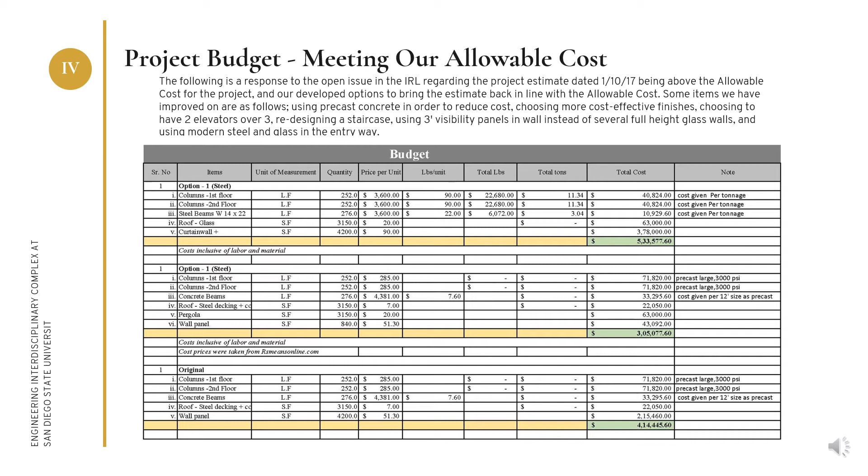To keep the schedule on track, efficient relationships between activities could be formed, and negative lag could be administered in activities wherever possible. Since the project is behind schedule and over budget, spending more time in the pre-construction phase and in value engineering to align activities will help.

A lot of construction activities can be done in parallel, and a lot of construction time related to that can be saved. Because of the collaborative work, most permitting and approval times are considered to be pre-planned and are eliminated at each stage.

Efficient planning can help in planning all procurement activities to be started on time to eliminate all lags. Because of all this, the new finish date is now July 18th, 2018, which is earlier than the suggested deadline.

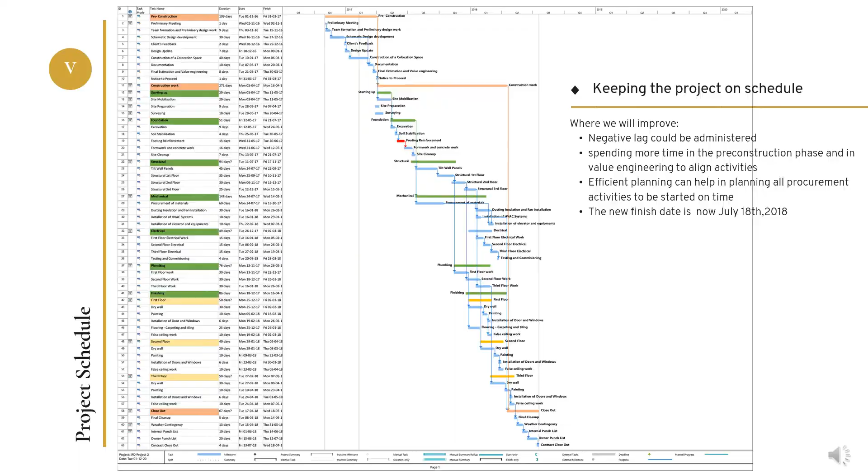Our construction management plan will explore different design options as well as other open issues covered in the IRL. Co-location in construction management and architecture refers to a common office hub where key team members work together to achieve aligned and optimized project goals using BIM, lean principles, and IPD processes by leveraging teamwork and synergy.

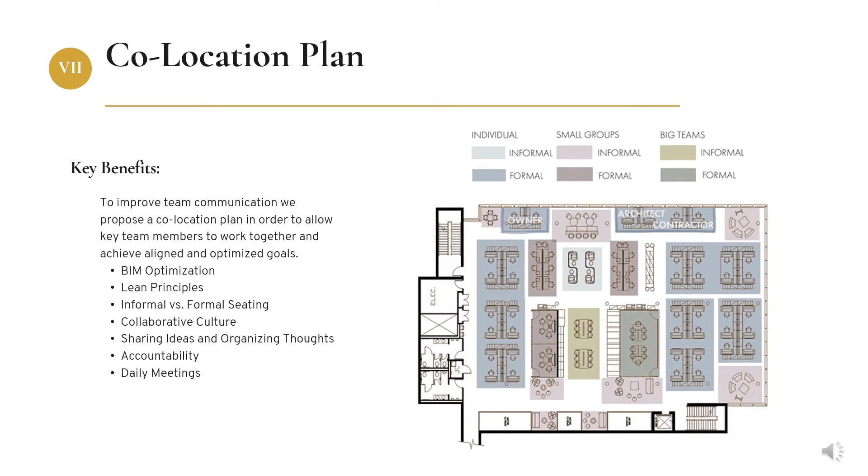We created a flexible seating arrangement that could be determined communally, depending on who needed close proximity to collaborate. We accommodate groups of varying size and played with the concept of formal and informal spaces to balance people who are more comfortable in traditional environments, while informal spaces are designed to take more fluctuations and be transformable. We foster a collaborative culture through using various walls as pin-up space or whiteboard space, and keep everyone on track with a wall-size schedule and informal morning meetings.

Our first design option study was to reduce the full height glass walls to a regular stud wall with a 3-foot visibility panel. Functionally, this achieves the same safety objective of being able to see into the space and be aware of the ongoings of the lab. Aesthetically, it is a detraction because you're not able to see the complete space. However, it still offers just enough of a view to pique someone's interest and draw them to the space.

For this exercise, we calculated the linear feet of the full glass walls, which is about 840 feet throughout the entire building. While we believe the resolution lies with having full glass walls at key parts such as the first floor, cafe, and key walls in public spaces such as the meeting rooms, we have shown a comparison of the full glass versus the visibility panel wall for all of the walls.

Our second design option was to look at the main entry, which we later evaluated again by looking at the modern glass entry. Originally, we picked this space to do a design option because unlike the north and south building, it doesn't hold highly technical programs such as labs. We felt that the current design was overbuilt for what it had to be functionally, and it was the greatest area for slashing the price of the overall building.

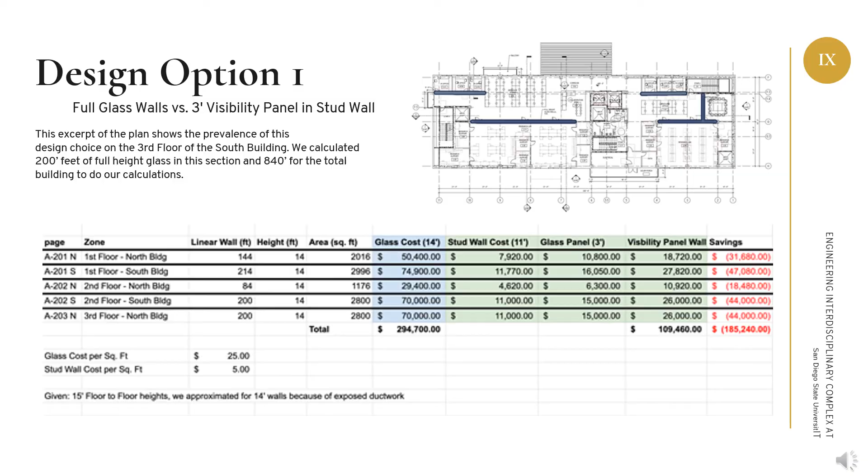To calculate the difference between the options, we used the vertical height between the floors to calculate the area of the wall space. We multiplied that by $25 for the cost per square foot for storefront glazing, then compared it to the other design option by multiplying $5 for the area of the stud wall plus the area of the vision panel, again by that $25 for the storefront glazing. The difference between the options was around $185,000.

We are going to later discuss the design strategy for areas to use this more expensive option and areas where the design will make a bigger impact.

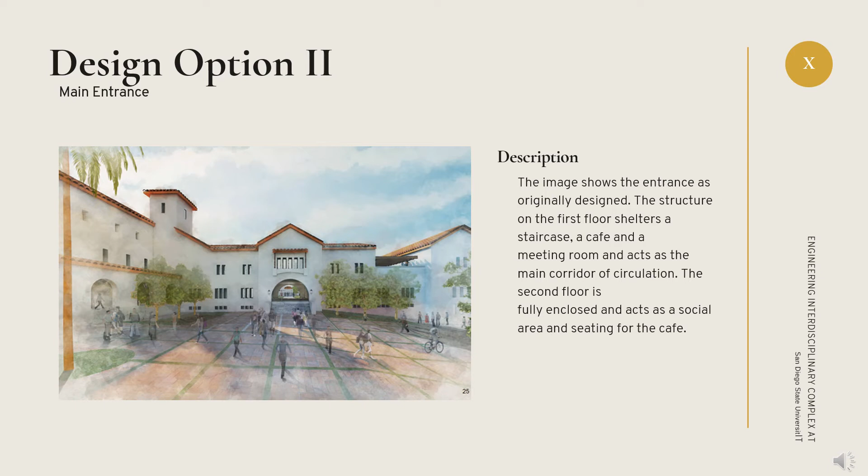We later revisited this when the owner requested we look at a modern steel and glass entry. This concept is an open colonnade repeated on both floors. The storefront and skylights allow plenty of natural light into the space and offer great views of the courtyard. This modern entry breaks away from the Mission Revival style, but keeps the building's internal rhythm and tries to emulate the color of the terracotta tiles with its red storefront framing.

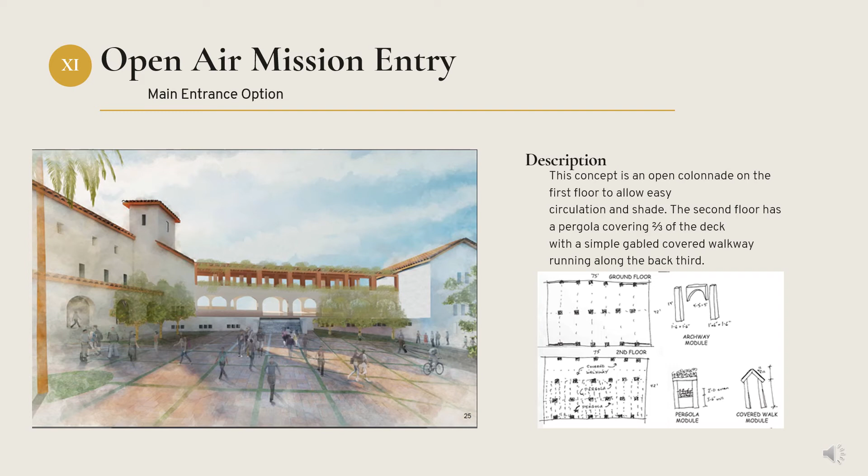Our team had worries about its greenhouse-like effect in the California climate and it gobbling up more of our mechanical and electrical engineering budget. We highly recommend not going with this option as it would be an eyesore, energy vampire, and have negative impacts on the budget.

Comparing the two design options in terms of cost, the cost of material is much cheaper for the colonnaded design option, that is option 1. This is because the first option will save money in terms of wall area footage and material cost since there is an open archway and colonnade on the first floor. The glass facade for option 2, on the other hand, will be costlier in terms of material cost as well as the wall area covered.

The glass roofing is also another high cost item that makes it the costliest option among the three. The structural cost of the steel and glass option, however, will be cheaper in terms of material due to the cheaper cost of the structural steel. When compared to the original design, the first option is the preferred design to save material cost.

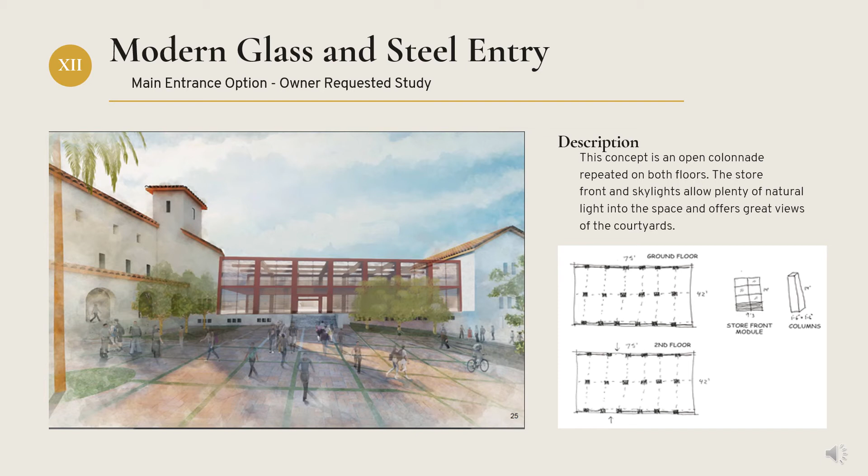Constructability varies for both of these options provided. The first option will require skilled labor if built on site and will be costlier and slower compared to the installation of glass wall. Contrarily, the structural construction time will be lower in case of the concrete option, saving time and money when compared to the steel structure.

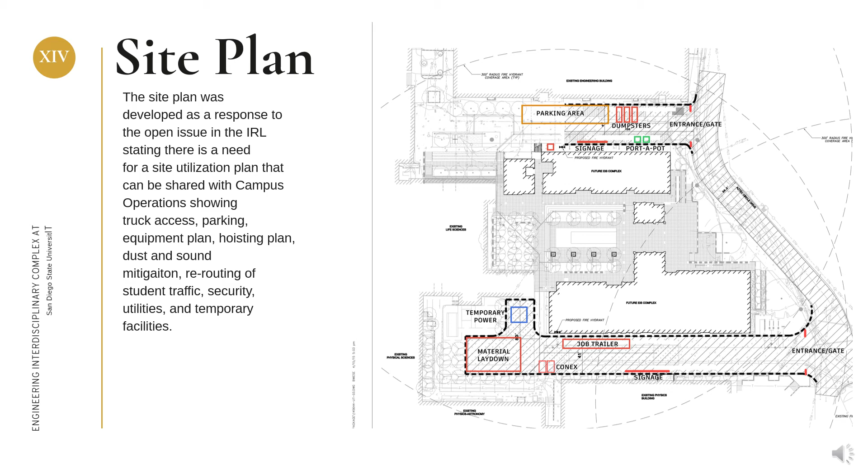The site plan was developed as a response to an open issue in the IRL stating there is a need for a site utilization plan that can be shared with Campus Operations showing truck access, parking, equipment plan, hoisting plan, dust and sound mitigation, rerouting of student traffic, security, utilities, and temporary facilities. The document to the right of the screen will show you the proposed site plan.

We have decided to suggest concrete in comparison to steel, considering some of the criteria such as strength, safety, cost, and environmental impact. Strength-wise, a reinforced concrete structure has relatively high compressive strength and gets tensile strength as well due to the reinforced bars. Safety-wise, since it's an educational building, occupant safety is always a priority, and concrete's natural fire-resistant property and its ability to sustain high temperature without losing its structural integrity makes it a great choice for a safe fire-resistant building.

In terms of cost, when compared to steel, concrete structures can be costlier in terms of the material cost, but since it can be sometimes built twice as fast, a lot of money can be saved in terms of a shorter schedule. For environmental impact, since the project aims to go for material and resource credit in LEED certification, which requires them to use a minimum of 50% of recycled demolished debris, and since the demolished building is also made of concrete, it makes a lot of sense to build the newer building in concrete as well.

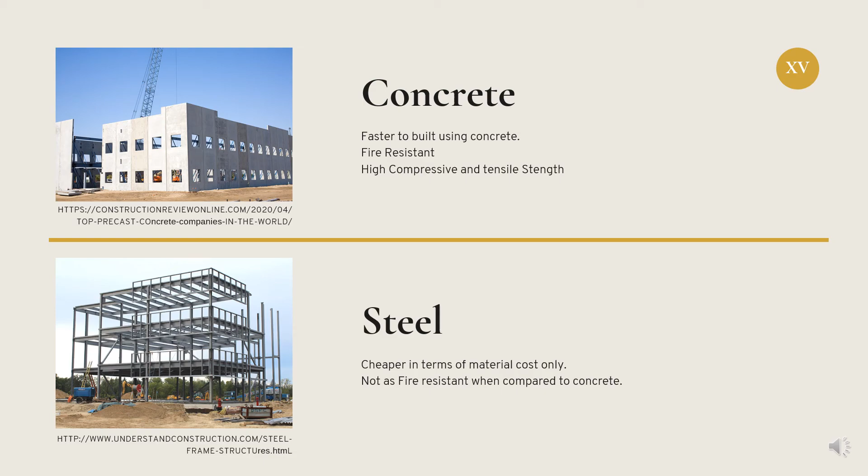The following response is a response to the open issue on the IRL regarding the fire marshal expressing concern about not having the capacity to review our project until January 2018. We have created a phased plan in order to allow for the fire marshal to review smaller components over a greater period of time in order to complete the project on schedule.

The fire marshal reviews cover an array of drawings, specifications, and schedules. We elected to break up the information into phases based on how granular the information is. Our strategy behind a deductive method was the fire marshal would be able to review more specific information concurrently with how the design was being refined, thus saving time and speeding up the schedule.

For example, we found very explicit and precise requirements for the lab in the building that would be pointless to cover during schematic design when layouts were fluctuating. While less items are covered in later phases, these issues will be resolved in greater detail. The phases are as follows.

Phase 1: Identify occupancy class and compliance with special occupancy requirements. Identify type of construction. Provide site plan with hydrants, property lines, and setback indicators. Provide floor heights and areas for each story of the building and demonstrate code compliance. Provide a hydrant calculation. Provide design numbers for fire-rated construction. Identify compliance with egress issues. Demonstrate accessibility compliance. Classify each space in the building with loads and calculations.